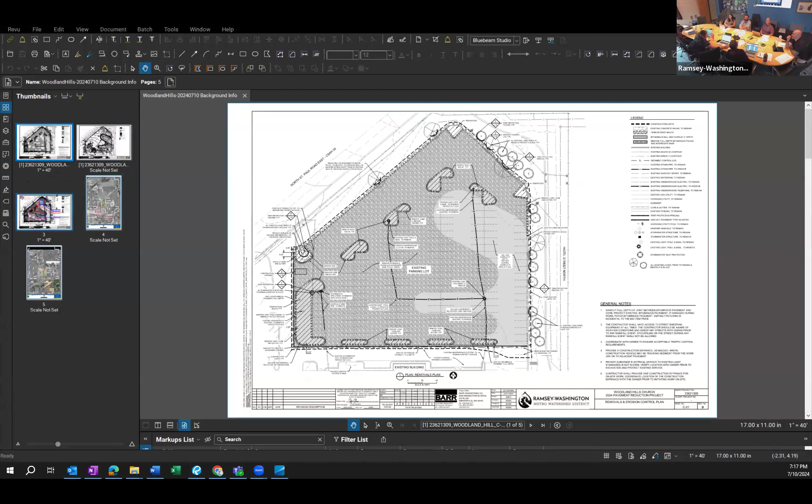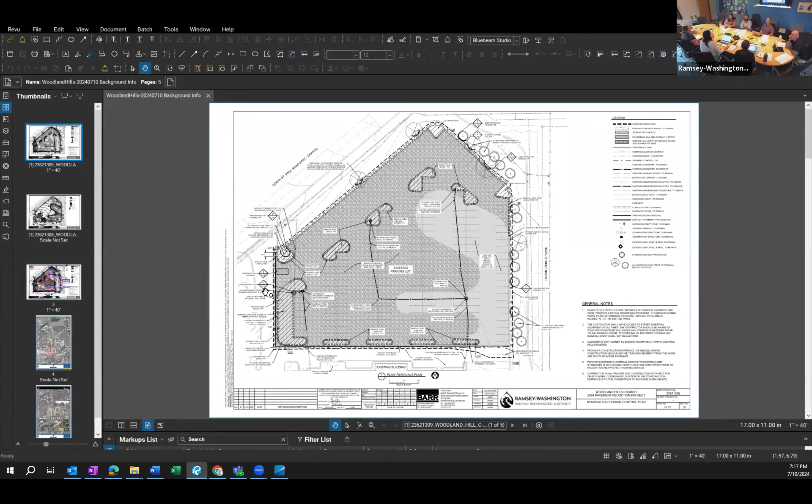Could you pause really quick? Somebody minimize the participants so we can see it better, it's hard to see. Do you know how to minimize the participants? Change the view. And the key to the view up at the top, right? There you go. The Zoom view was hard. I'll just point to it. Let's try this. Is that better? That's way better.

Okay, so what I have up here is the existing conditions and demolition plan that we had pulled together as part of the project.

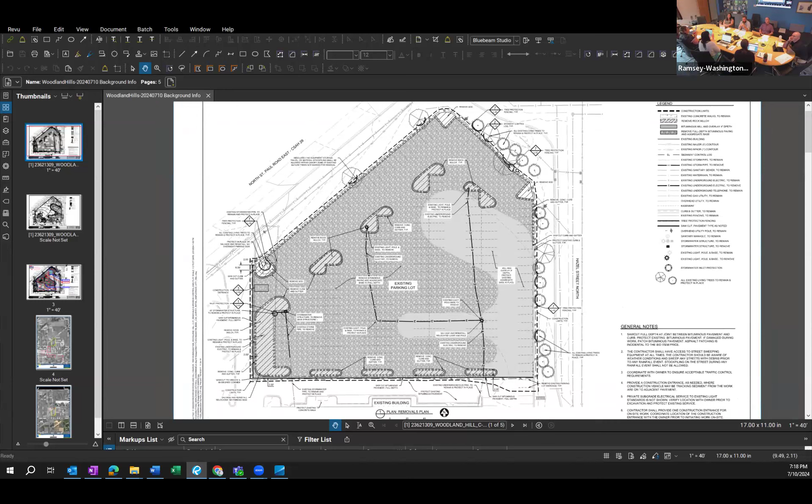This is just to give you a sense of the limits of this pavement. From the beginning, we've been looking at this as a pavement reduction project. We just maybe didn't think it would be quite so much pavement.

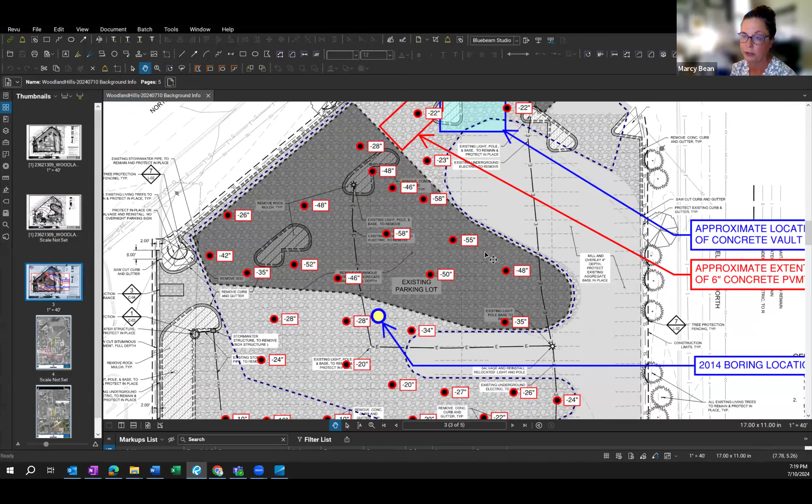So this is kind of complicated, but after we spoke about a week ago, after Shoreline Landscaping had done 3 different test pits, we decided it would be worth going out and doing more test pits, and they took that very seriously. All the red dots you see here are the test pits dug last week to really try to get a better handle on the real volumes of stuff that was subsurface that we just didn't anticipate.

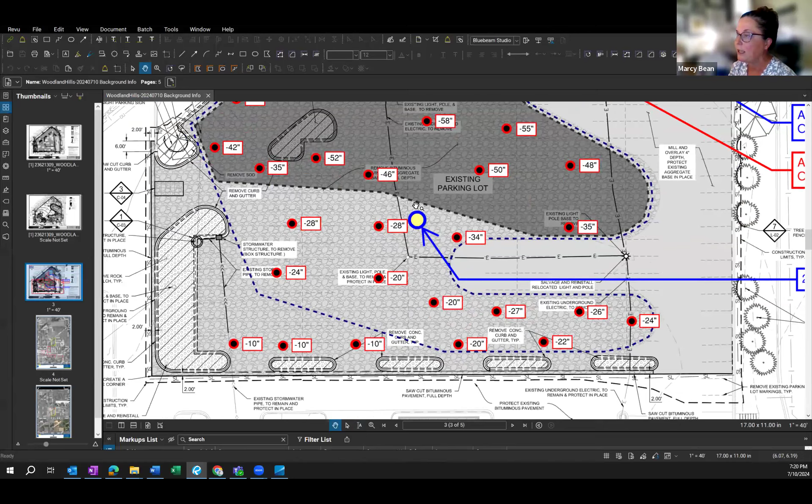So you can see it's shallowest here, written by depth. So 10 inches beneath what the existing parking lot surface would have been, but Shoreline had already removed that topmost layer. So it's relatively shallow toward the church and then gets a little bit deeper. This blue spot is where our soil boring was, and this dark gray is crazy deep amounts of material.

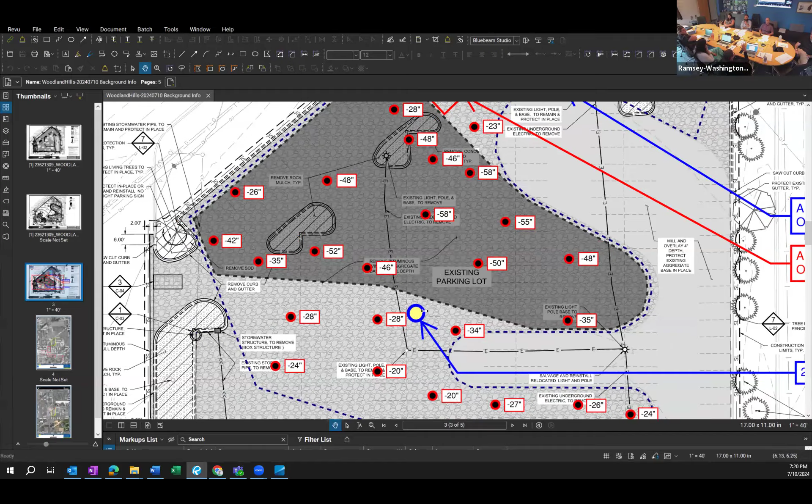If I can jump in real quick, that depth you're seeing is both bituminous pavement and sub-base. For example, in that soil boring, we saw a relatively thin layer of bituminous, like 2 inches, which is pretty thin actually, and then there was sub-base below it. So something like that isn't, those are thick layers, but that's not too crazy. What's really significant is that the bituminous depth and sub-base gets really, really deep in that gray area.

Just to clarify, on that one boring in the project area, recognizing it was done for other purposes, what depth did it reach? Certainly to the depth that you're seeing, 15 feet, so well below what... it wasn't that it stopped short, it was plenty deep to make sure.

What did that one show? Because it's in between a 28 and a 34. Right, so that's interesting too, because it showed 2 inches of bituminous and then a couple feet of silty sand. I don't know if that was from Glacial Valley, is that the name of the company? Anyway, that was the drilling company that looked at it.

I don't know if they were seeing sub-base or kind of a strange sub-base and classified it as silty sand, but it certainly wasn't 2 feet of bituminous.

I get why they spread out, I like the distribution. Have y'all thought about boring in some of those thicker areas? It's a little suspicious to see something that thick.

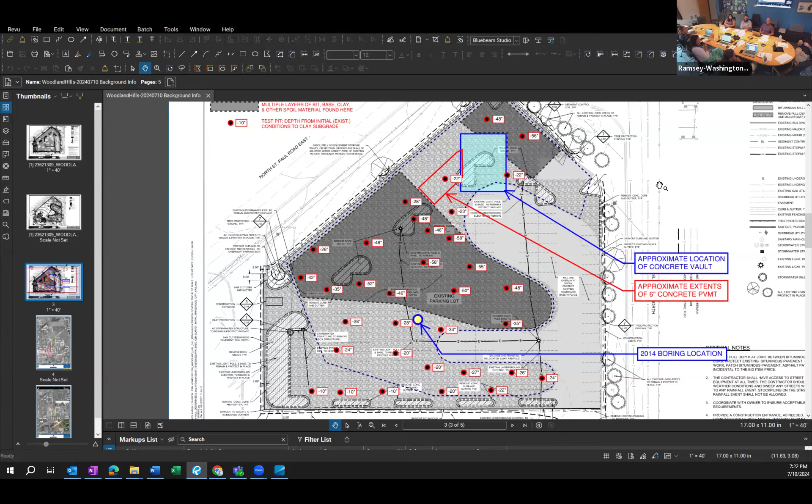A gray area, 58 inches at its thickest, 5 feet. Those are test pits, open excavations. There's holes like that all over. But is it hiding something below all of that bituminous?

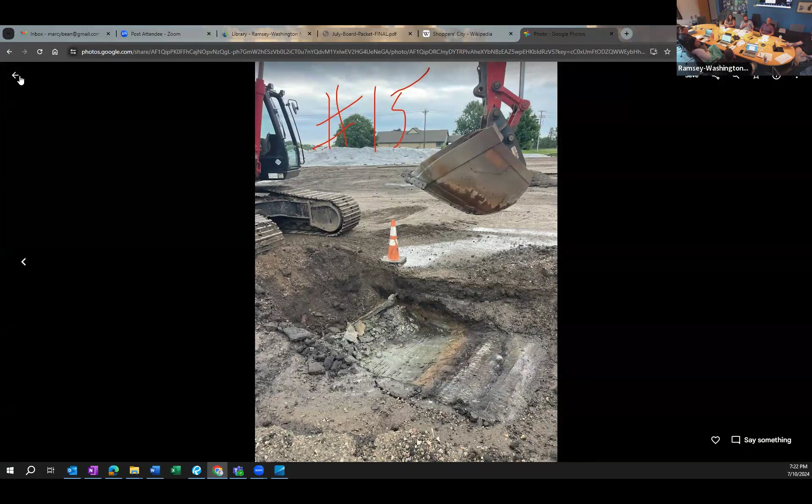Well, there is a concrete vault. That's odd. They went down until they got to what they thought was the clay, which seems to be native. That's the depth they dug down to. These are what these test pits look like.

It's a real mystery as to why. We've been trying to do some forensic analysis here over the last couple of weeks to try to better understand what decisions were being made. We can't know what decisions were made, other than at some point the owners chose to bury layers and layers of parking lot.

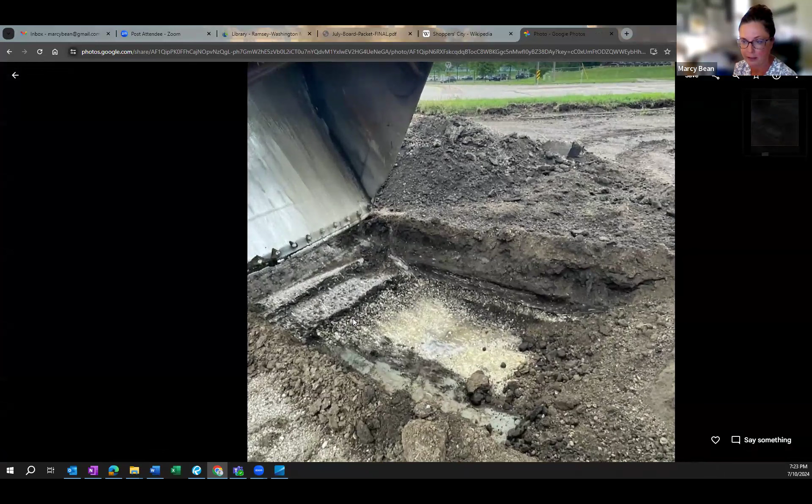It would be more clear, I think, if it had just been a whole bunch of extra aggregate underneath, but you can see in this picture it's a full parking lot stacked on top of another full parking lot, and in some cases more.

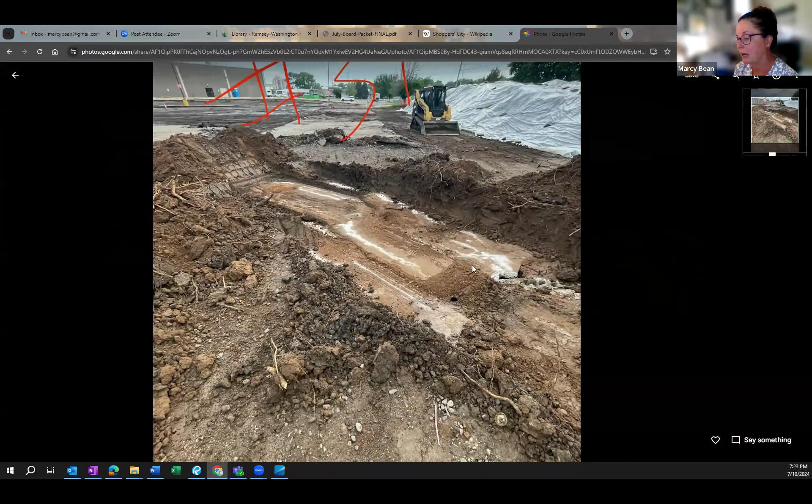Additionally, there was a portion of the site where they unearthed a concrete slab. That was somewhat unexpected, so again we went back to our historical aerial photos. So there was a shallow thing we were calling a vault, and then a little slab.

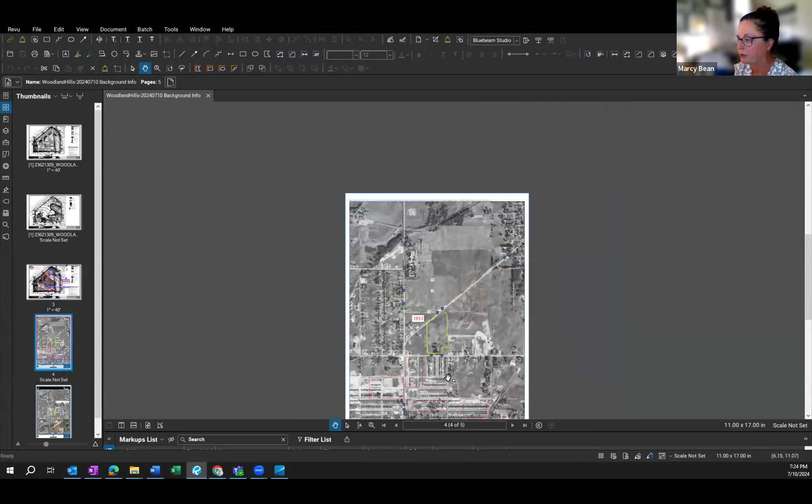So we went back to our aerial photos. When we did the initial aerial photo analysis, really what we were looking for was anything that looked like it might be a wetland, because the church had some concerns about water underground—somehow there was maybe water stuff going on. We checked on the work that had been done at Aldrich and didn't find anything there, and through our historical aerial photos we didn't find anything that would lead us to believe this would have hydric soils or be a wetland.

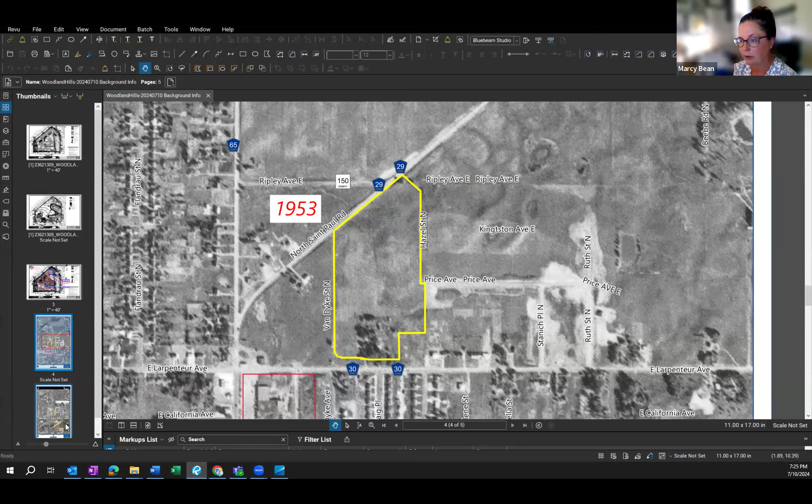Now, they are clay soils, so that presents its own challenges. This was a 1953 aerial photo, and we had done a series of these, but I pulled out this one specifically as we were going back to try to figure out what the heck this concrete piece is on the site. This one is from 1966. I did notice there is an error—I had put in the memo that this had been a Slumberland Furniture. It was actually a Shoppers City, which was a precursor to Kmart.

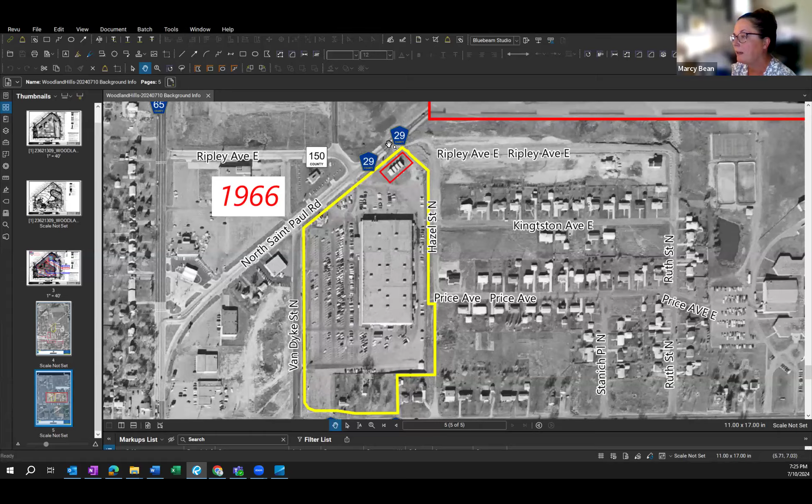Then there's this strange little structure up on the corner of the site, that the roof line just made us question what this thing could be, because all of the parking lots were in a similar footprint where they stopped about midway. Where were you looking at these aerial photographs? Because when I pulled this up, I was specifically drawn to that.

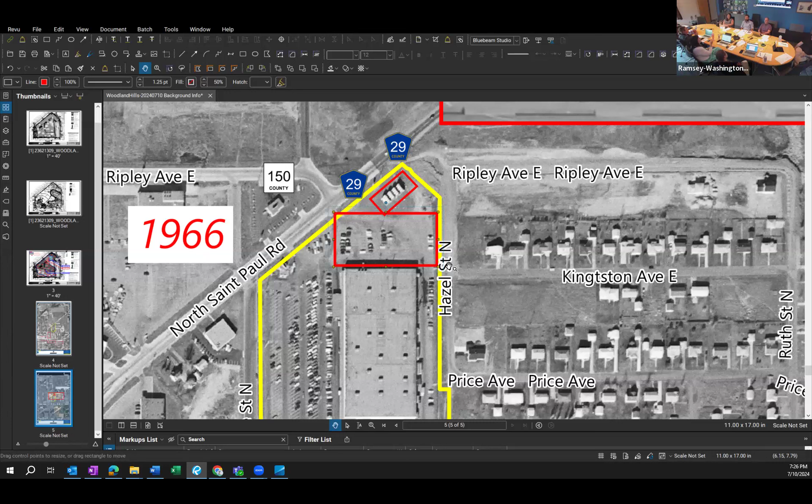The aerial imagery you pulled was from Google Earth—it's not really a satellite, it's more of an oblique photo. So I immediately went to the Ramsey County historical photos, and that parking lot shows up in 1973.

And so we were trying to unearth what this structure could be, and this is what we think it may have been—sort of, I'm gonna call it a pop-up car wash.

Mark just had a look of recognition. Well, there is maybe not similar, but there is a car wash in that vicinity—not going too far. I live in the area, I've lived in that area for like 32 years. I've seen like 4 different establishments there.

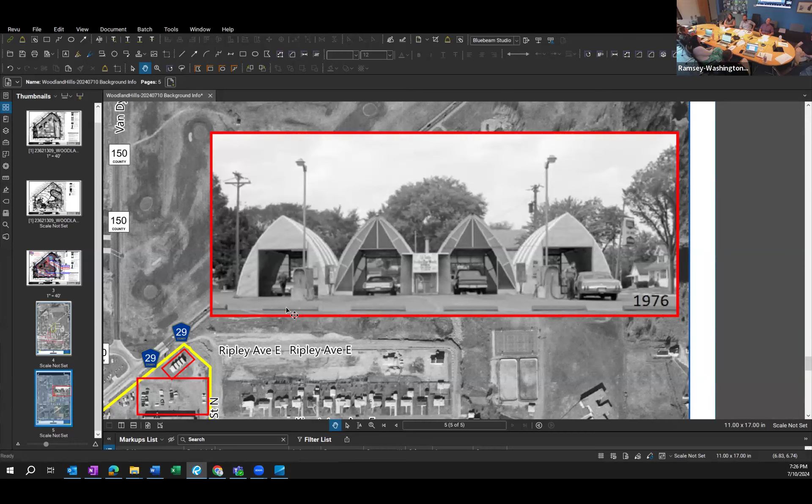It's had some history definitely, but that looks like a car wash type thing that I wonder if they moved to the south and abandoned this. Is there any evidence that maybe things like this might have just been pushed over and left as rubble?

So what I'm really asking is, are these various layers, mostly bituminous other than the one area of concrete, fairly contiguous or are they patchy?

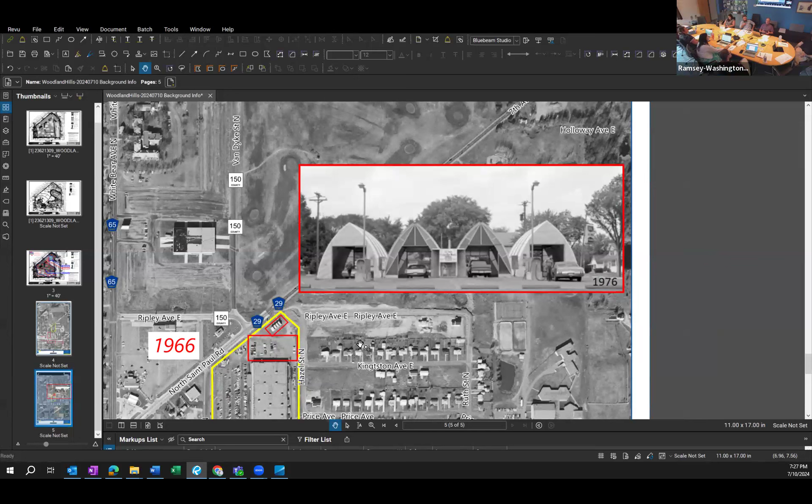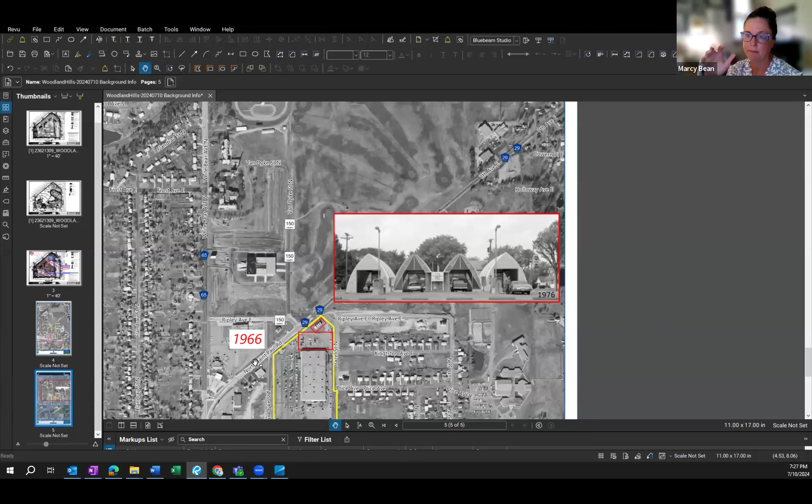Without having excavated more, we've been looking at it a little bit piecemeal in how the pits are being done. But we can infer from the depths that perhaps this was an original parking lot and then at some point it expanded.

We think that at some point, so I was going to show, in this aerial photo I also pieced in one from 1991. You can again see that the main parking lot stopped about midway, but then it expanded out to its current footprint around 2002.

That parking lot in 1991 is there. This is a really poor photograph though.

I was surprised to see you using Google Earth. Google wasn't founded until 1998, and their satellite imagery didn't start till a couple years later. Their historical photos were crowdsourced and shouldn't historically be counted on, so I was surprised that was a source photo.

Because if you go to the county website on ArcGIS, we have free satellite imagery going back to like 1940. You pull up 1991, that photo even looks like it's from 1960. Pull up 1991, you can clearly see parking stalls, so I kept going back. 1985, there's a parking lot. 1973, there's a parking lot. Then back to like 1960-something, there is not.

So that parking lot has been there since at least 1973, all the way to that north corner. There even used to be an exit drive up there. And you start to see, like right where in 1973 those roof lines are, that's gone, and there's kind of a gravelly patch.

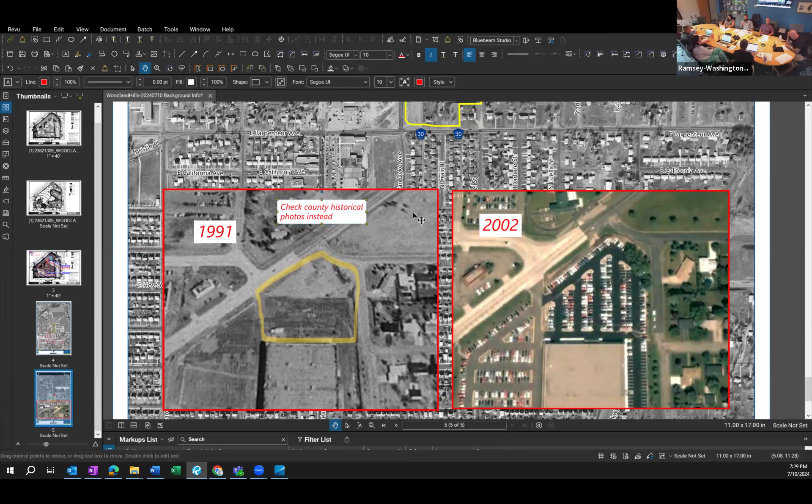I would suggest looking at the county aerials. Sure, they provided me with a lot of insight, but it's definitely a lot older than that.

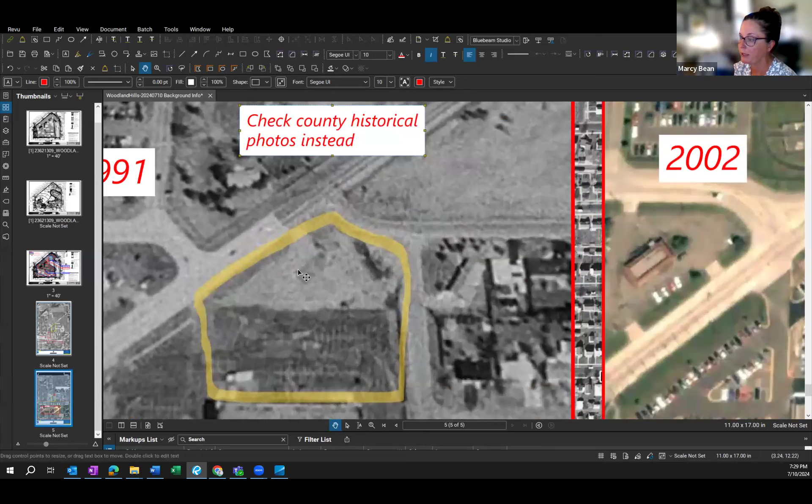Sure, so we were speculating that, because you can kind of see the footprint, this little gray blob is similar in location to where we think the car wash had been. So presumably at some point they had decided, well, because there had been over a foot of clay put on top of that concrete.

We did find that during the test pits. At some point they decided to just cover that up and then extend the parking lot up above that, so presumably that changed how deep things were at that site.

Marcy, as you guys looked at some of those, do we have evidence of the elevation change over time? Because it seems like they increased the elevation by like 5 feet. Is that something on the public records?

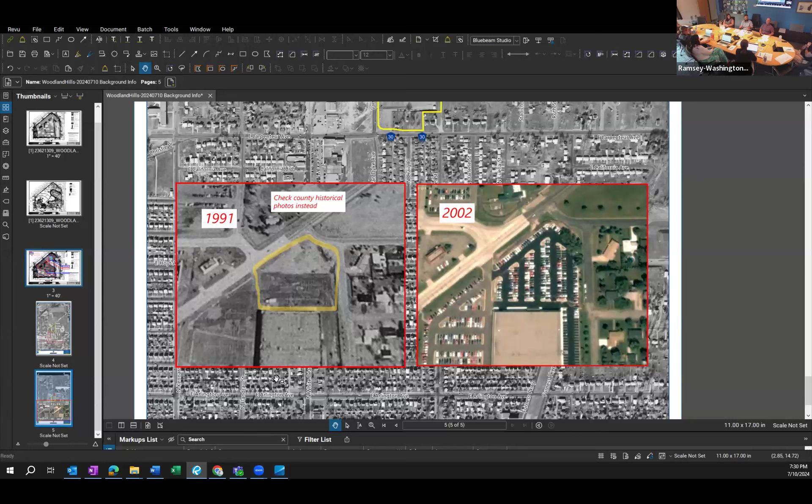I just can't really see elevation, you can see where that concrete area is. It's like they kind of paved around it and kept maybe intending to do something with it, and then all of a sudden they're like, just pave it. It's like they were grading with bitumen.

Ask for forgiveness, not permission, that's what I was curious about, that type of deal. Yeah, and the whole site is built up a bit.

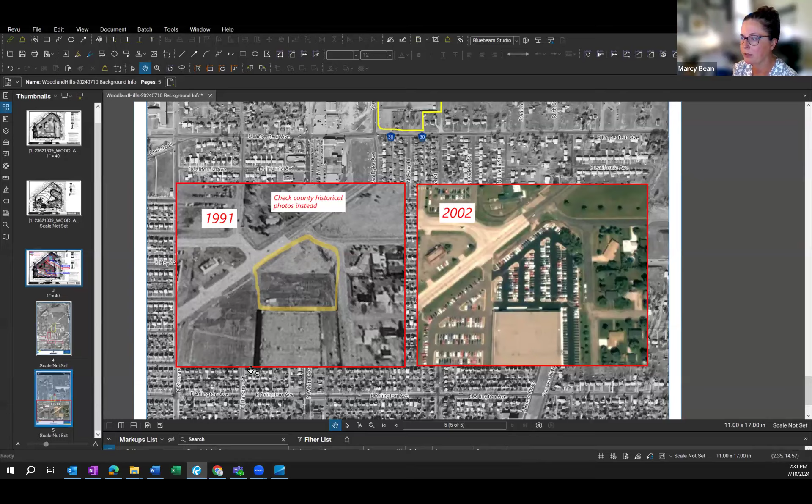From the road, if you assume that initially when they built the parking lot it was more in line with the same elevation as the road, it's certainly built up now. Even the boulevard space that's left is quite high relative to North St. Paul Road.

That's very curious and very interesting to understand, but we're still left with, this is our current condition, and how do we want to move forward?

I think some of the questions we're trying to dig at, and this is just where my head was at the end, is what other little things are we gonna find. As you guys have looked and researched, I know removal of that is something that's necessary for the project.

But it just begs the question of, oh man, that was a rough find, what are the finds you're gonna have? My question goes to, have you done or attempted a boring at that very odd location?

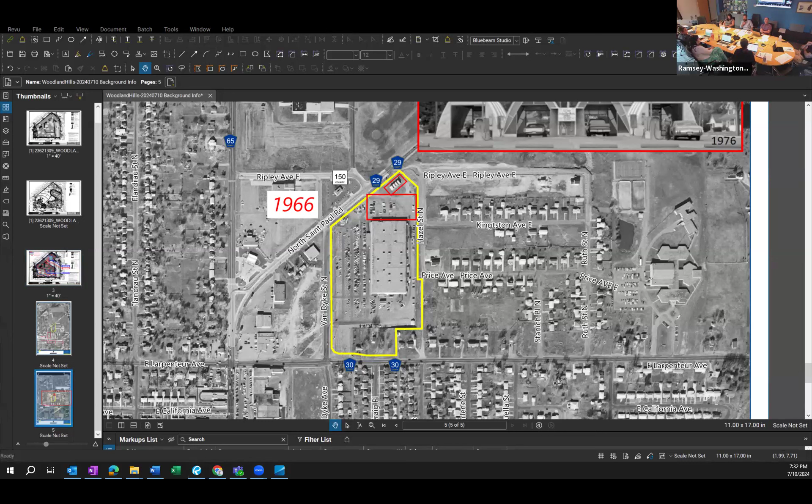Because I'm almost thinking there's a vault under there that they didn't want to deal with, and they were told they had to, and someone just paved over it. Well, they did find the vault. Yeah, you want to mention that briefly, Marcy?

That was that blue box earlier. Yeah, so there was just a little spot you can kind of see here where it had, and it's fairly shallow, small CMU block that was holding up a little bit, so the solid slab is back here, but it had sort of a lid, is how I was envisioning it, set on top of these CMU blocks.

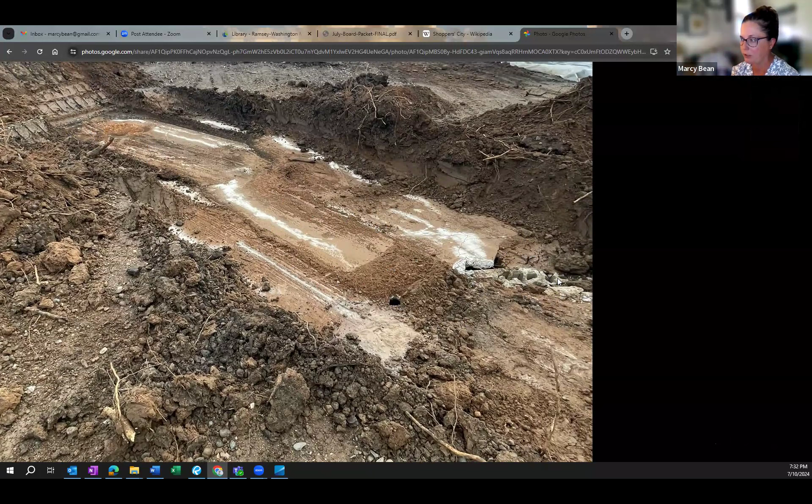And Shoreline was able to, because they kind of chipped it when they looked at this, peek in there without entering the space. And there were signs of some pipes. Stefan, feel free to jump in if I'm stating this incorrectly, but there were some pipes. I mean, it gave a sense that this was used as a vault of some sort.

But have we done any type of testing into that vault to see if there's some type of contaminant that needs to be removed before you can put a public space on top of it? I mean, is it a brownfield at this point? We haven't gotten that far. Right, where prices are gonna go from just $200,000 to remove, it could be $1 million to remediate.

What we saw in the vault was a lot of soil; the other walls of the vault had been crushed or caved in. So there wasn't a huge void, but there was some, like an old iron pipe, maybe 3 inches in diameter. Interestingly enough, there was a 1-inch poly pipe in there too. I didn't see a lot of pipes, but you couldn't necessarily tell what was inside the vault because there was soil kind of pushed into a few of the exterior walls.

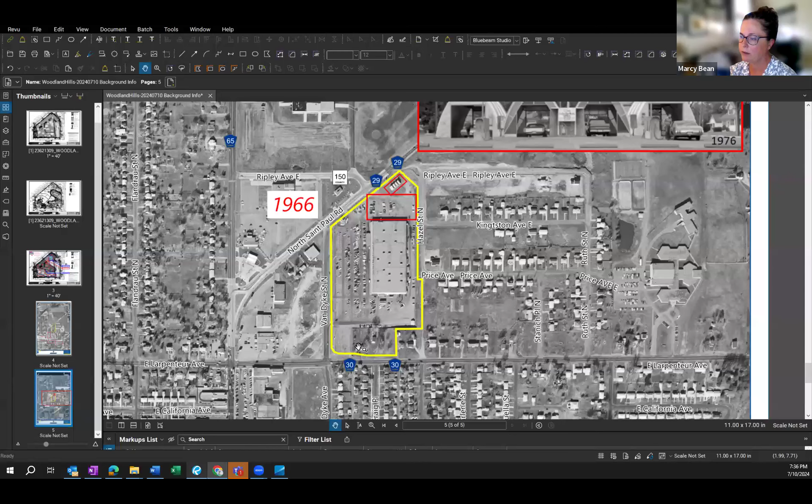And I think, Marcy, is that a good time to talk through the options? I think that might help answer Ben's question too. Well, yeah, so we've been trying to think through scenarios of what we can do to either keep the project moving forward as designed, or what if we just put the parking lot back? It's a lot of pavement, a lot of curbing, we'd have to do some calculations, but let's say that's a scenario. Scenario A is we cover it back up, we repave the parking lot.

Scenario B is we look for opportunities to reduce the excavation, so perhaps the paved area gets bigger so that we don't have to dig out quite so much, and the rain garden needs to get bigger. We can't tell without full redesign and cost estimating if that would end up being a wash or if that would be beneficial to the total project cost, assuming that we have clean soils and we can just excavate it all.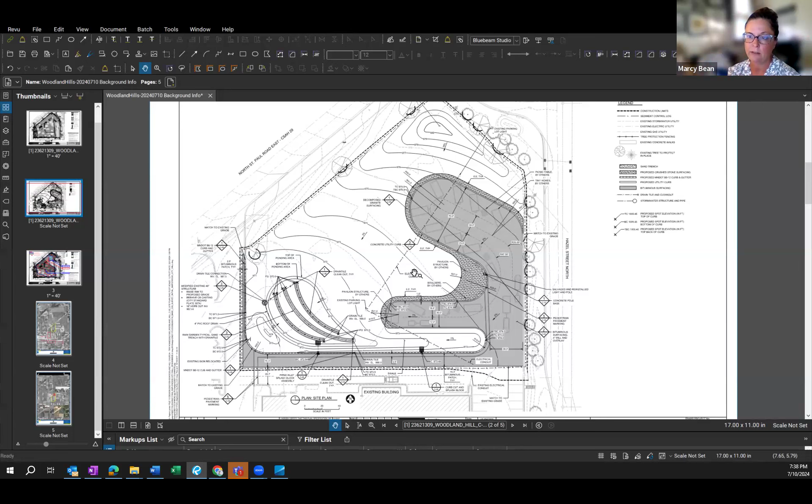The church's preference was to not cover it back up and not put another Band-Aid on what appears to be years of decisions to cover this thing up. Their preference was to try to maintain the design as is, but maybe play with the elevations of the grade, bring in less fill. Maybe once it's excavated, shoot points to try to bring things closer so we're not having to haul in other fill. It's six of one, half a dozen of the other to some extent. Stefan has created a 3D model utilizing all of these points to help estimate the volumes we think we'd need to remove from this site and subsequently bring back in as fill. Stefan's been noodling on those numbers trying to figure out the most efficient way to deal with that, assuming these are clean and can just be excavated and disposed of.

So preliminarily we felt like the 200,000 mark is in the ballpark as we fine tune these options. Are there pieces that can be salvaged and used as fill elsewhere? We're throwing out a lot of options to try to keep the project going, but at the end of the day it's stalled right now as we try to chart a path forward.

I have a question on that, Marcy. I like the purpose of what they're trying to do, but it feels like the time to go slow and investigate a little bit. I get a sense that the contractor and many people have thrown in a lot of time the last two weeks and have solutions, but I definitely have some hesitance in terms of have we done enough of the discovery process. Should we slow down a little bit just to ensure we have our ducks in line? I think I'd be more comfortable approving grant funding or funding of some order that allows us to ensure and build confidence in the strategy looking forward.

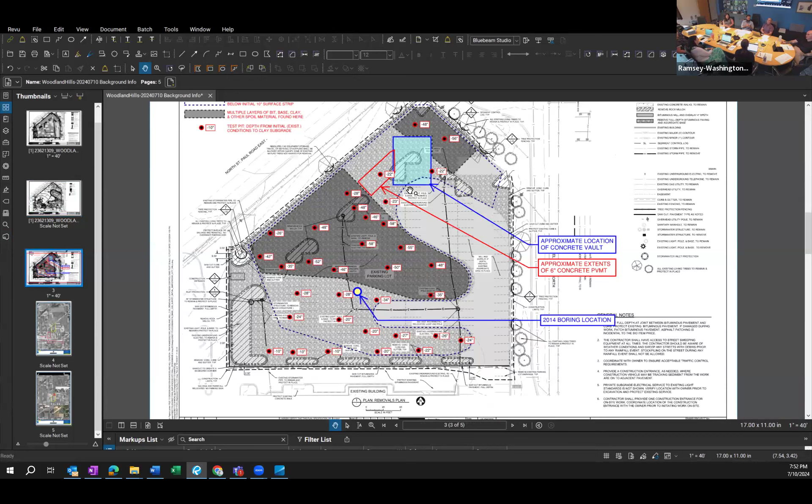If they chose something like the middle option where we don't want to get into this, we'll repave and bring the water down to that southeast-western corner to the rain gardens. It could still be accomplished. But that's a decision their board would have to undertake as to what plan we move forward with. I wish there was a way to divide these sections into different parts. For example, if you do the southern section first, I'd feel more comfortable looking at how the pavement was, and okaying a pavement removal that's less than a foot, maybe a foot and a half, seems less daunting and gets us to some of the BMP work.

Yeah, I guess just where I'm at is, I commend you for carrying this project forward. And personally, I would be willing to provide additional funding, recognizing this challenge.

But I would really like to have a clearer understanding of what the end point is, because it seems to me like there either needs to be some additional investigation or there needs to be some revision to the plan going forward in terms of its layout. And I really want to avoid a series of additional changes.

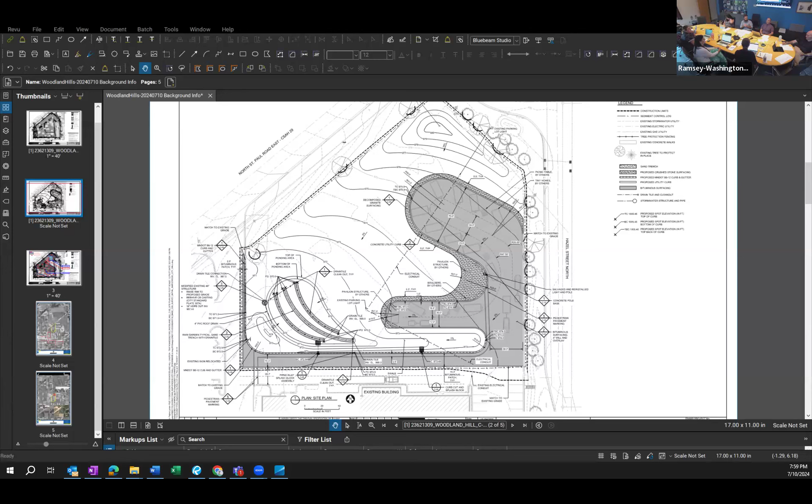So why don't we do this—all in favor of the stewardship grant budget adjustment request 2416? Can I get a motion to approve budget adjustment request 2416? I will motion to approve the budget request for 2416. I will second that. I definitely want it noted about the extra information as it comes through, but for next time, agreed. So all in favor, say aye.

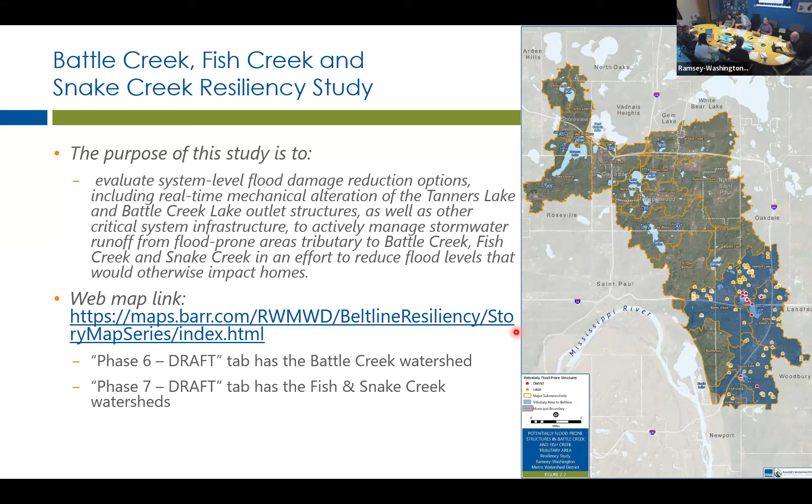I don't know if any of you have seen that one before, but this study is now up on that web map with the areas that we studied, looking at both the pre-project impacts and our proposed modifications to address those impacts.

In 2020, they completed the Beltline resiliency study. In the four years since then, many of the projects identified in that study have been implemented or are being worked on right now - the Phalen Village project up on Lake Phalen, the Phalen Outlet, stuff like that was identified as part of that study. So this study was just completed last month.

Now the projects that we've identified here can be included when we're looking at what projects to prioritize, combined with that Beltline resiliency study.

I won't dive too deeply into the details of the H&H model updates. We worked with the various stakeholders in the district - the cities, MnDOT, counties - to get the most updated storm sewer data that they have, so that we could add that resolution to the models.

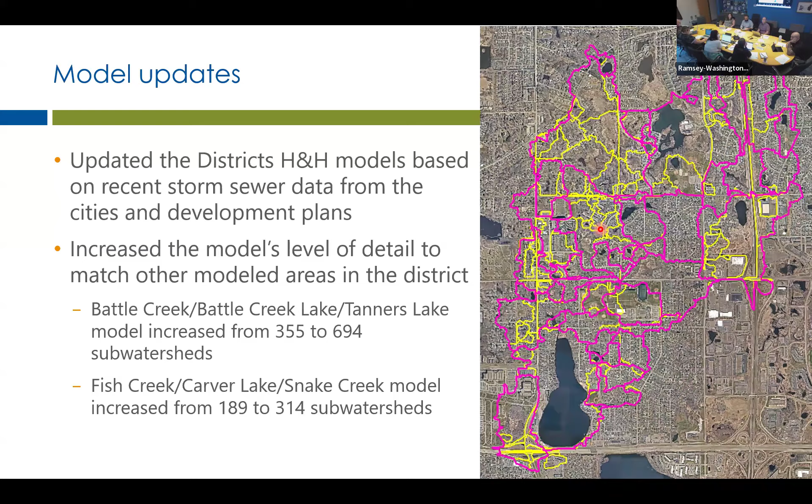So the process for identifying those potentially flood-prone structures was: we updated the model, then ran the 100-year, 96-hour design event storm through the model to establish elevations in all these ponds. Then we went through a GIS process to map that elevation in each watershed to get the inundation extent - how far out the water extends - and then intersected that inundation area with all the building footprints to see what buildings fell within it.

Jay, did you only run the 100-year, or do you have a sense of where it looks like for a 50? We ran the whole spectrum, but that 100-year, 96-hour is the floodplain elevation that we used to establish it. I was just kind of curious how vulnerable those are even at smaller rain events - that's kind of what I was curious about. Yeah, we could definitely look at that.

We have that data. Yeah, not needed now. I know, yep. Sometimes we get into that in the feasibility phase. Right, the next phase, yep.

So once we located all those flood prone structures—not counting backyard sheds or park pavilions, but places where people live or work on a regular basis—we divided them into two categories. One was district flood risk areas, those on district-managed water bodies or near district-managed facilities like BMPs and pipes, where the district has control or interest. The rest were due to constrictions in the municipal storm sewer, far away from district projects or water bodies.

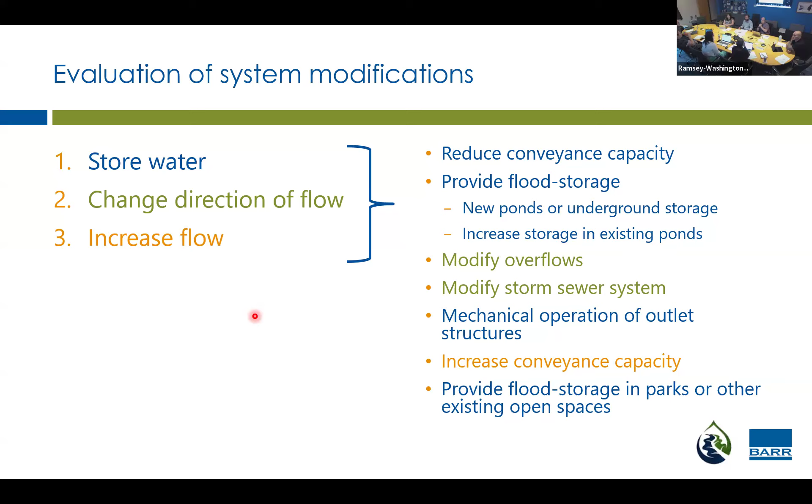I won't go into too much detail here—there's much more in the report—but in the Battle Creek system we identified 4 different areas with system modifications that could be implemented. The first 3, 1A, 1B, and 1C, are all very linked. If we do one, we need to do all 3 because they are in sequence. So if we do something at Tanner's Lake, we have to do something at Battle Creek Lake to accommodate the additional water, and we also have to do something at McKnight Basin to prevent increases in flood elevation there.

1D is kind of a standalone project, to the northeast of Battle Creek Lake, up over here. That one could be implemented without the other 3 being done, because it's a self-contained project up there.

We also looked at 2 different options for addressing the flooding around Carver Lake. They are independent of each other. One looks more at adding upstream storage. The other looks at modifying the Carver Lake outlet and downstream culverts to remove water more efficiently.

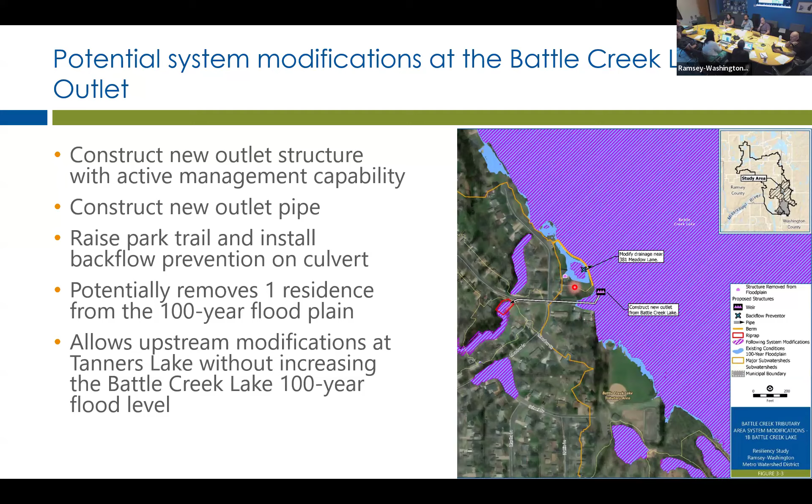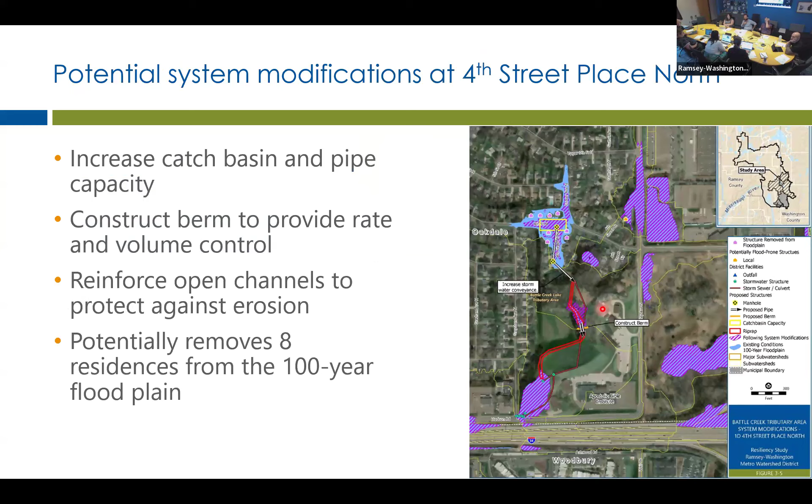So getting to costs, we're at the very beginning stages here. We're at like a class 5, so it has a very wide potential cost range. Projects aren't cheap, as none of these are. For the Battle Creek area to do all 4 of those projects, on the low end we're looking at perhaps $5.3 million, on the high end $21.5 million.

That standalone project falls in a $1 to $3.5 million range. Just to highlight that one, for the Fish Creek Carver, that one has a very wide range too, depending on which option it is. The one where we add a lot of upstream storage is the more expensive one, just due to the cost of removing a very large volume of material. But again, none of them are cheap.

These have not been optimized at all. That's the next stage of the project, to do more detailed feasibility studies, try to get it into more of this class 3 range. Then we can start really doing a cost of the project versus cost of purchasing properties, getting more of that cost benefit. I think it's interesting to think about our process for the beltline areas, where we've done that feasibility and start evaluating, or do more refined surveys, and then we find out, oh, it's not 8 homes, it's 4, or this is all that needs to be done. There's a whole process where we start at the high end.

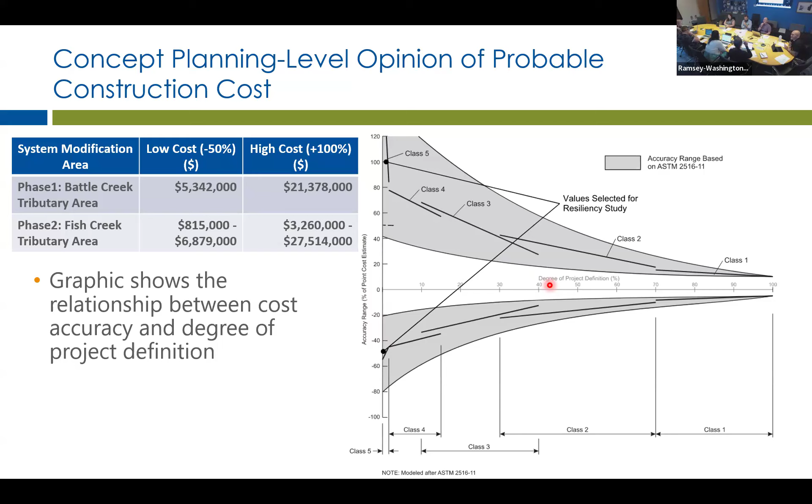So kind of next steps, as we did submit that work order or work plan for Battle Creek Lake, Tanner's Lake, those outlets there, that's what we're going to be looking at next, the process of refining that.

There's potentially some water quality benefit to that project that we want to look at more closely. Unfortunately, we're not going to be able to gather all the observed data we need to really do that water quality aspect of the project. So a lot of that work is getting pushed to next year. Not a lot of design work will be done this year, but next year we should be getting a lot more updates on that.

We could also potentially start looking at that standalone project, the 4th Street project, because that one is standalone, so we could parcel it out. We haven't developed a work plan for that yet, but it's something we could look at. Possibly lower on the priority list is the Carver Lake one, just due to the high expense, and there's only 4 properties on that one versus the 29 up in Battle Creek Lake, but we could start looking at that one as well.

The final point was stakeholder review. Review is maybe not the right term, because it's more of an ongoing conversation. We've been in conversation with them and will continue talking with the cities, the county, and everyone, sharing all the data and the localized flooding issues, working with them on those as well. Something like number 4, that's when you'll start refining and engaging the institution, doing a specific site survey to verify the low elevations.

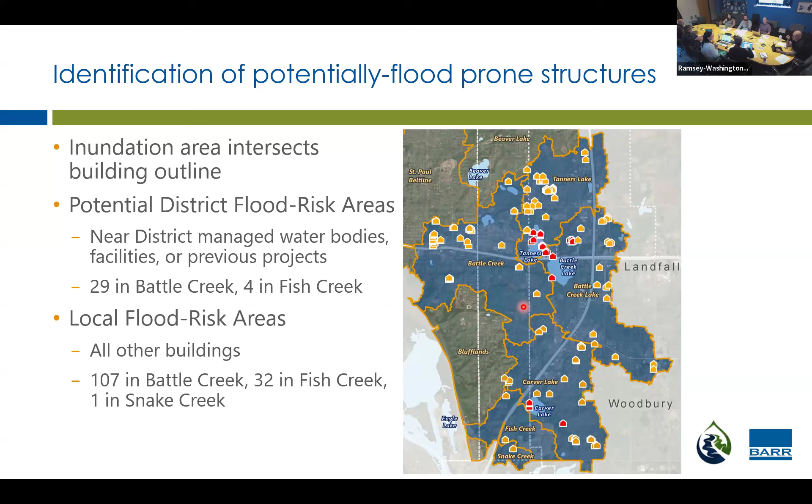For number 2 on your next steps, I love the write-up in the report highlighting the benefit of monitoring that particular outflow site. As you plan through it, there's a lot of value in that, so I was just curious.

Yeah, and on water quality, Jay mentioned the need to do more water quality monitoring on Battle Creek. I mentioned that in my budget memo, so that's what that was.

Thank you for sticking around. I appreciate it. Thanks, Jay.

Moving forward, the other two are no presentations, just for information as well. If we have questions or comments on the watershed, I'm going to pause. On the Kohlman Lake internal load, in the interest of time, are there comments or questions on that from the board?

I only had one, more like, what drives us to the additional sediment cores? Given our long conversation earlier, is it just better to pay for additional sediment cores? Oh, it's task 1B, forgive me.

Yeah, no, I see it. It may or may not be necessary. I mean, I guarantee it—Keith Pilgrim and Tyler Olson are on this project, and Keith has designed a lot of different alum treatments. He's sort of a national hero in that regard. If he thinks more cores are needed, he will ask for more cores, so you don't need to worry about him.